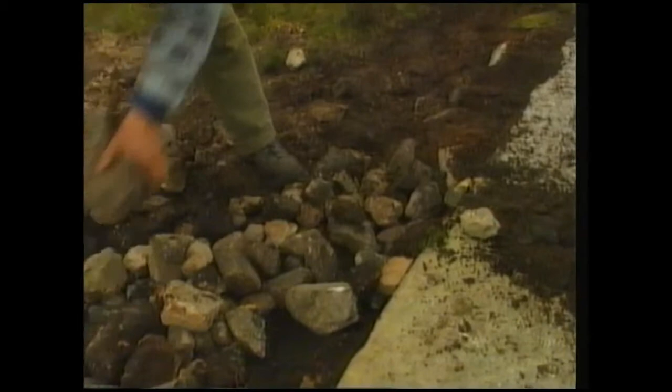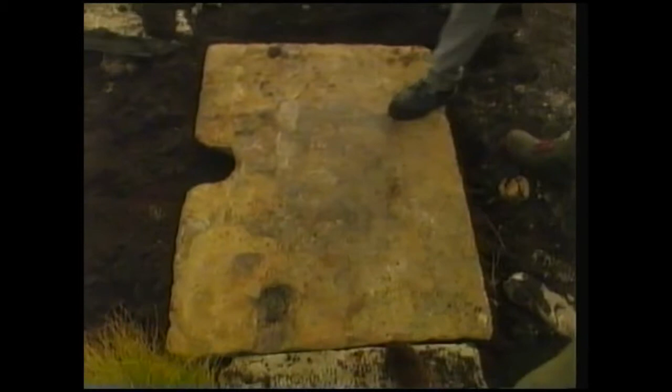Footpaths are quite simple to make. Dig off a level surface and put down some paving stones. Then shore up the sides with rocks and turf. Oh, it's a beauty. It would take thousands of walkers to wear this away, and you could eventually replace it.

But how would you build a road for heavier traffic? One of the first modern road builders to tackle this problem was John Metcalfe, who was born in 1717. He was known as Blind Jack because he lost his sight at the age of 6. But it never seemed to bother him much. In fact, he was a keen sportsman.

Jack was once offered a lift from London to Harrogate, which was more than 200 miles. But he turned it down because the roads in those days didn't exactly give you a smooth journey. Jack was convinced it would be easier on foot and spent most of the walk thinking about how to build proper roads. Even though he got lost twice, he still made it to Harrogate in 6 days, 2 days faster than the stagecoach.

One of Jack's first big projects was to build a road across the Pennine Hills on very soggy ground. He always decided for himself exactly where his road should go, although no one could figure out how he did it. Once he decided where to put the road, he had trenches dug on either side, with all the earth heaped into the middle. When this was dry, Jack laid bundles of heather, first one way, then the other, to make a strong base.

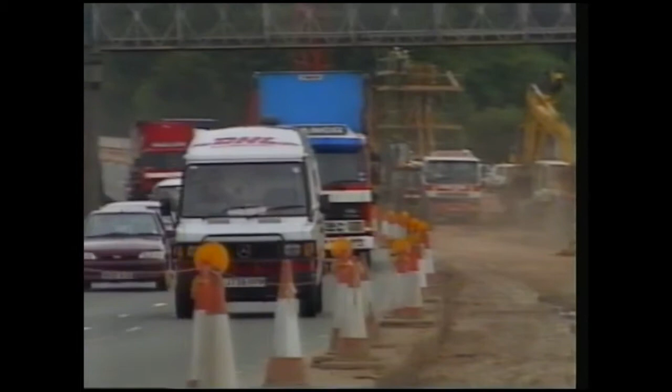Road builders have to know if the ground is strong enough to support the traffic. They also have to be sure that the slopes of cuttings like this one won't collapse onto the road. Cuttings are often used to take roads through hills. After the ground has been dug out to the right shape, the road is built up layer by layer using many different materials.

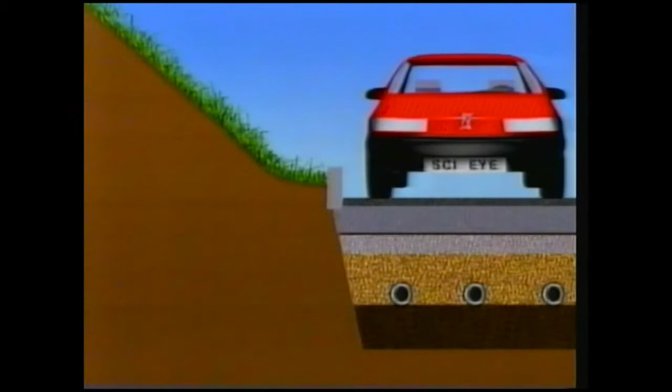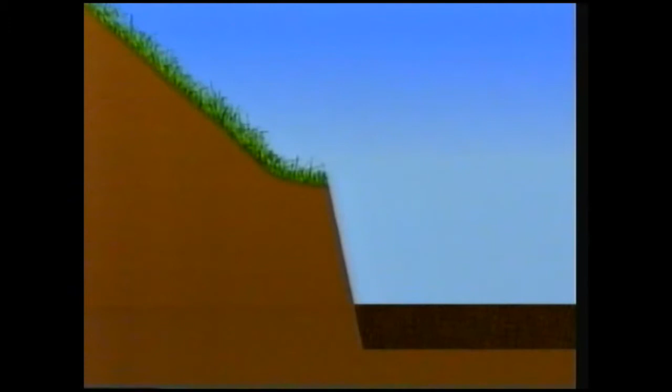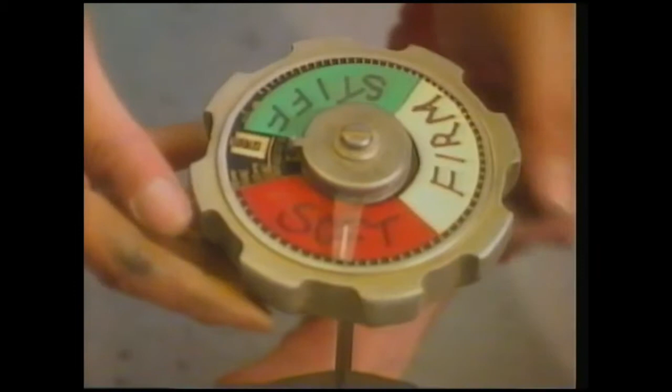The clay in the ground underneath has to be strong enough to take the weight of all these layers. In a laboratory near the road site, they can do a quick test on the clay that they're building on. The stronger the clay, the more difficult it is to twist the little propeller. The strength of the clay depends on the size of the particles that make it up and on how much water it contains.

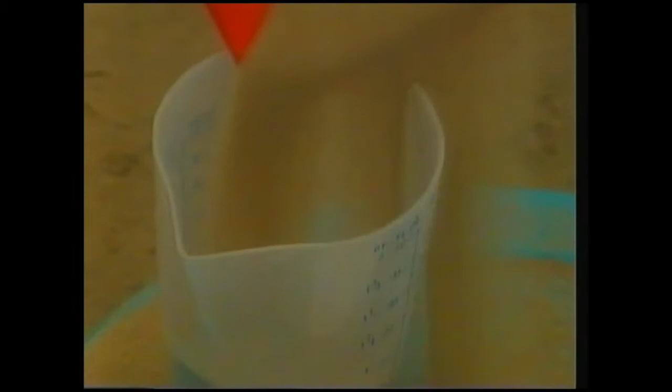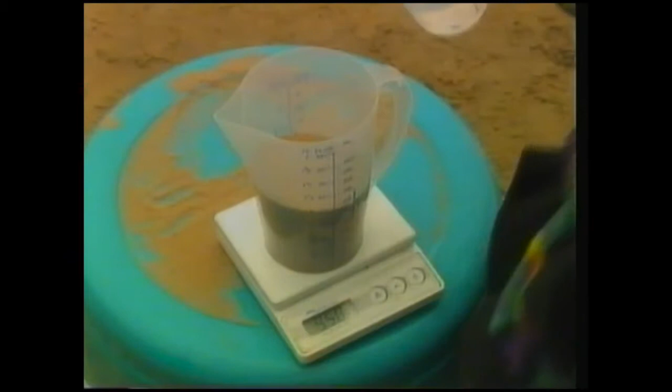The strength of building materials often depends on water content. Everybody knows that the perfect sandcastle needs just the right kind of sand. If you want to get scientific about it, you can work out exactly the right water content for sandcastles. He's weighed out 950 grams of dry sand. If he now adds 50 grams of water, then he's got sand with a water content of exactly 5%.

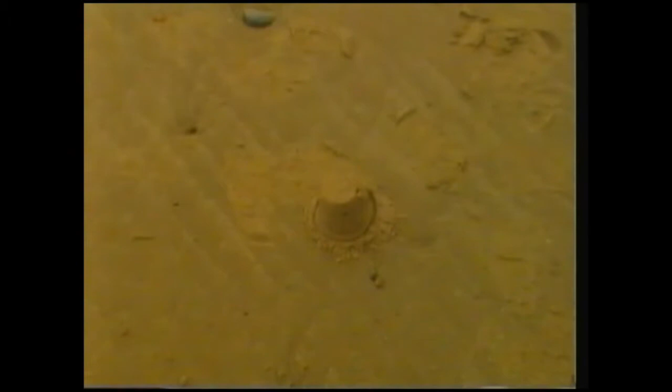To test the strength, he's going to see how much weight it can take. Making the sand wetter should affect the strength, but by how much? If you've ever tried building a sandcastle, you'll know that sand gets a bit stronger as it gets wetter.

But if you make it too wet, it's completely useless. Having found the perfect amount of water to use, he's ready to mix up a decent amount of sand to build with.

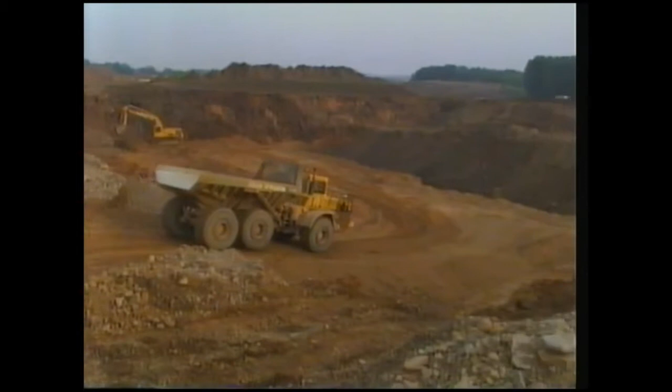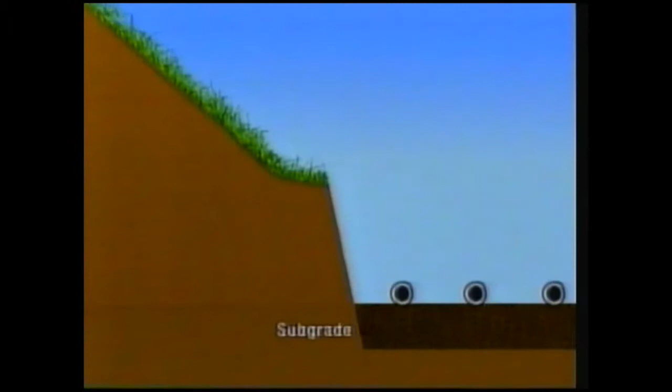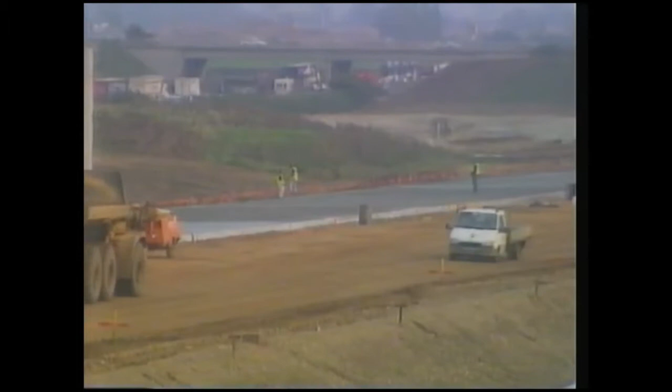If you're building a road, you need something for vehicles to move around on while you're building. The capping layer is made from sand and gravel, which are taken from pits near the road site. There are usually bits of stone in it as well. Drainage pipes are laid to take away any water, which would reduce the strength of the capping layer and the clay underneath. The capping layer helps to support the rest of the road and gives a flat surface to move around on.

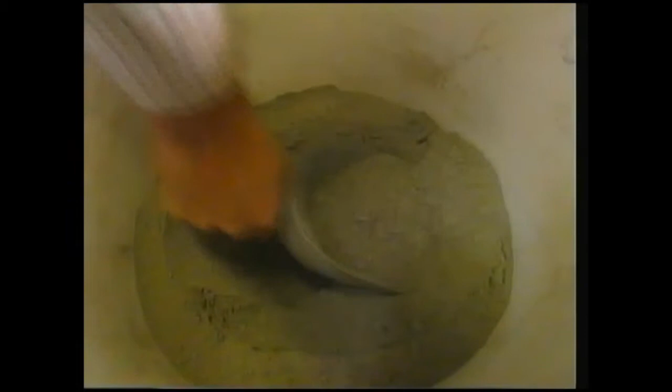The next layer of the road is concrete. This concrete mix contains two different sizes of gravel. The gravel goes together with sand and cement, a manufactured material which holds everything else together. When all this is mixed with water, it makes a very strong building material. You can make cheaper concrete by using crushed rock instead of gravel and putting in a bit less cement. But it won't be as strong.

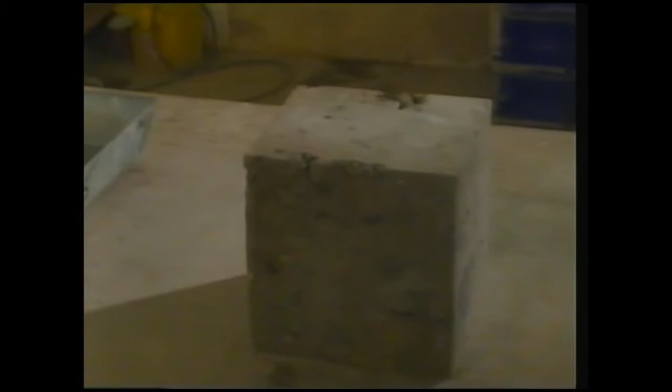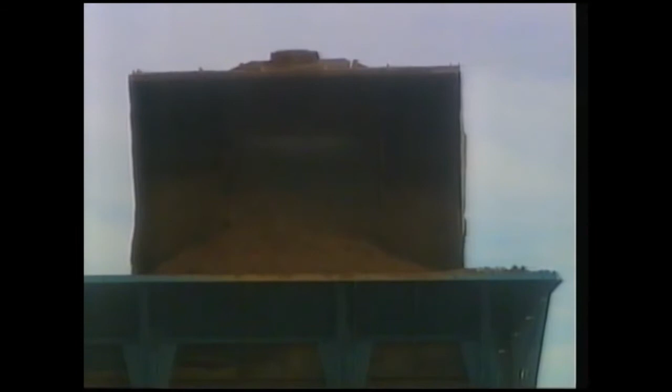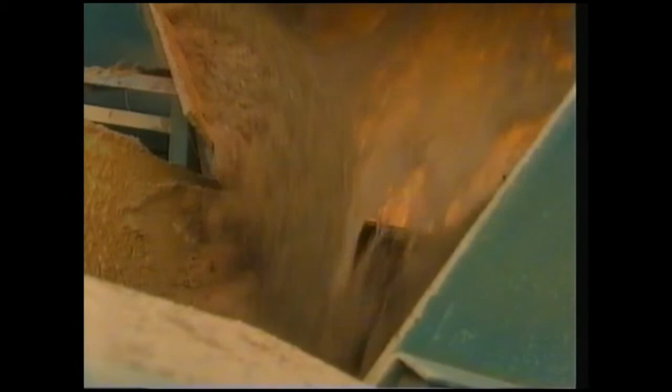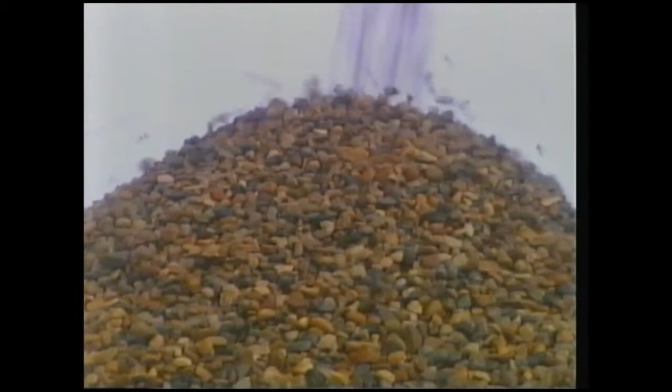Road building needs enormous amounts of concrete. Most of the raw material is dug out of nearby pits. It's washed and sorted into sand and different sizes of gravel. The sand and the gravel is then collected in the right proportions and fed into the concrete mixer with cement and water.

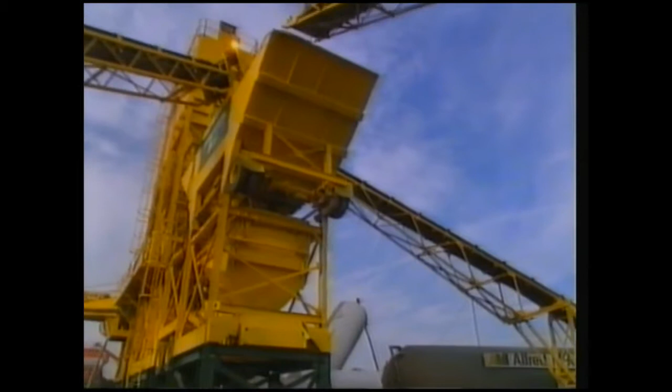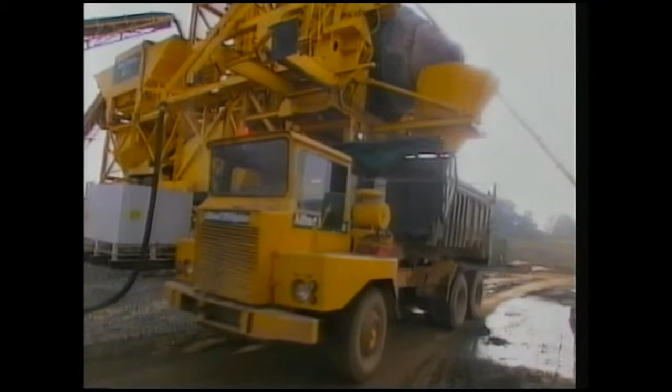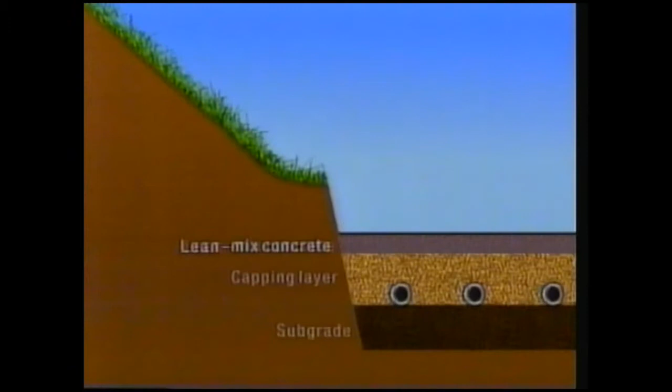Concrete is still wet when it's laid on the road. A layer of tar on top keeps water in while the concrete sets. This is a chemical reaction. The cement reacts with the water to give the final dry concrete.

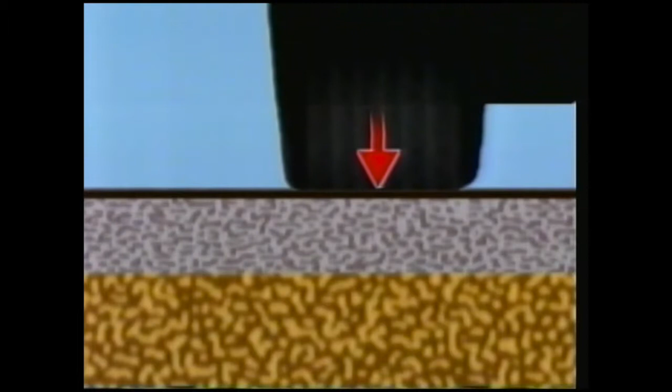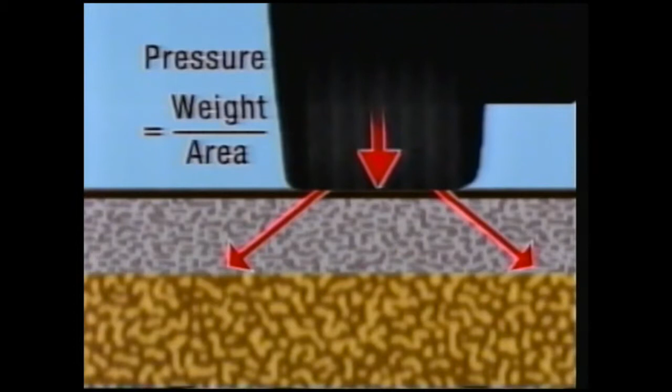The weight of every car puts a large force on the road. But particles of sand and gravel in the concrete cause this force to spread out. The pressure on the road is weight divided by area. By the time it reaches the bottom of the concrete layer, the weight is spread over a bigger area. So less pressure is put on the layers underneath. Concrete is incredibly strong in compression. That means you can squeeze it very hard.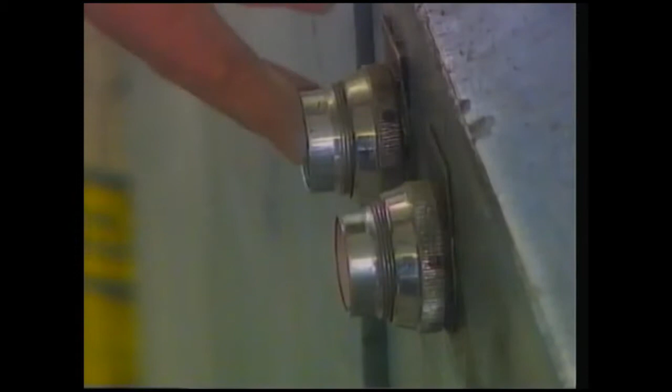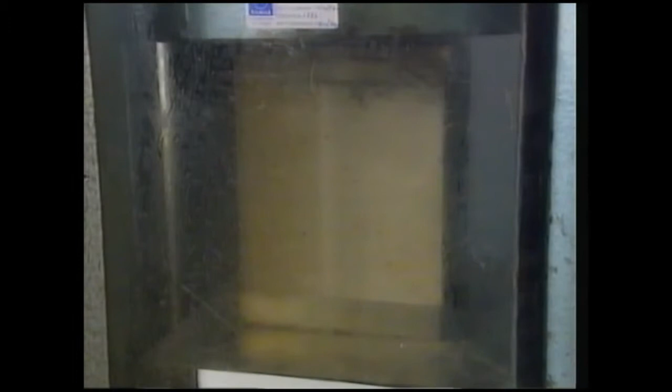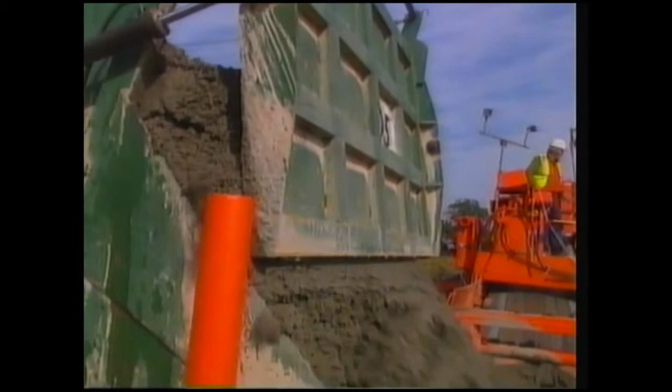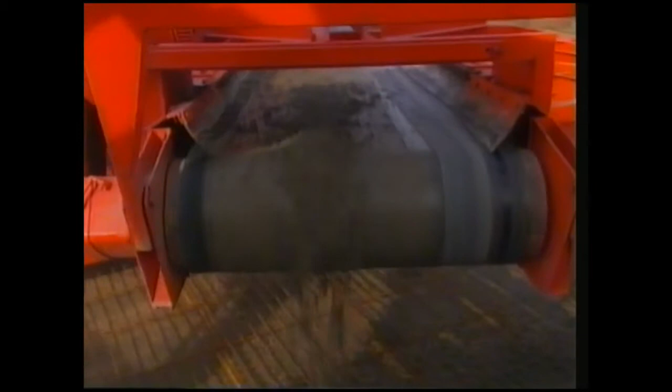A small amount of each batch of concrete is tested to make sure it's up to standard. It took 800,000 newtons of force before it failed completely. That's the same as the weight of 10 double-decker buses. One layer of cheaper concrete has already been laid down. They're about to put down another layer of stronger, more expensive concrete, but it has to be reinforced.

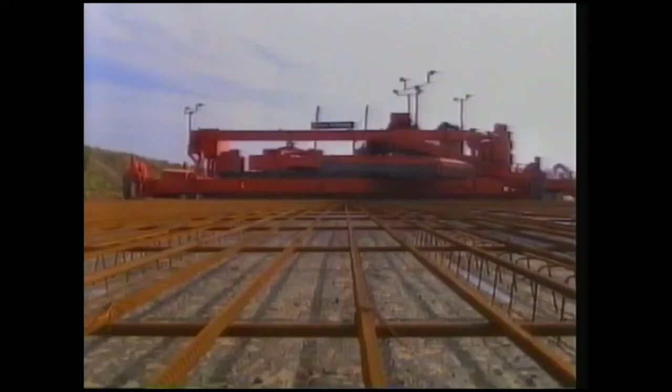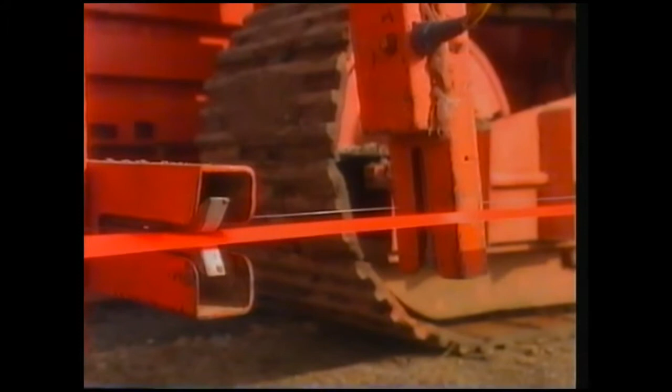When a load is put on a layer of concrete, it bends. This squeezes the top half of the layer, but we know concrete can be squeezed very hard. The bottom half is stretched. Concrete is not as strong when it's stretched, so they have to strengthen the bottom half of the layer. Steel reinforcements are placed on top of the previous layer of concrete, and the new layer is poured in. A thin wire marks the thickness that's needed, and powerful pistons keep the whole machine suspended at just the right height.

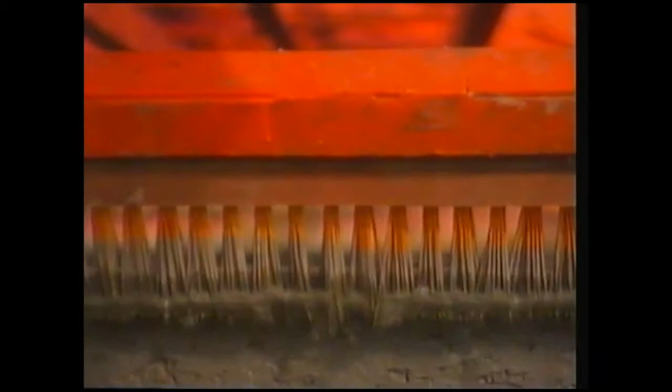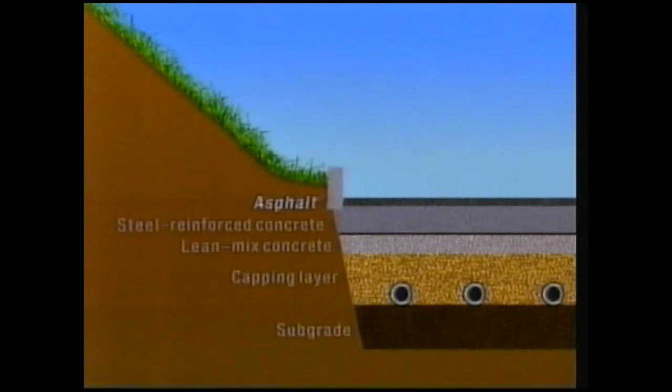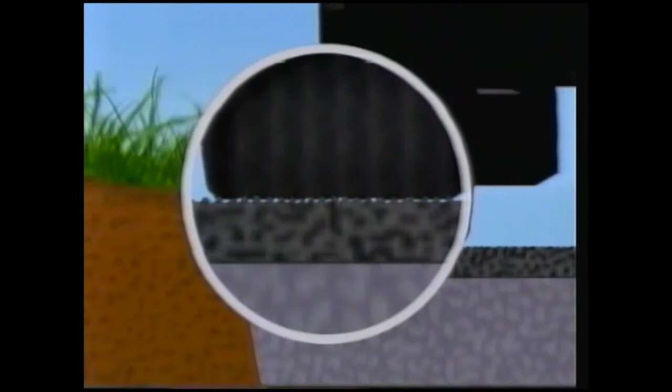There's one more layer of road to come. Why isn't smooth concrete a good surface to drive on? The surface of a road needs to have good grip, so that vehicles can stop quickly in an emergency. Surface water has to drain away, because it makes the road lose grip. The very top surface of a road is usually asphalt, which contains very tightly packed gravel held together by tar. If you look more closely, you can see that small chips of stone are rolled into the asphalt before it sets. This gives a rough surface, so car tires can get more grip.

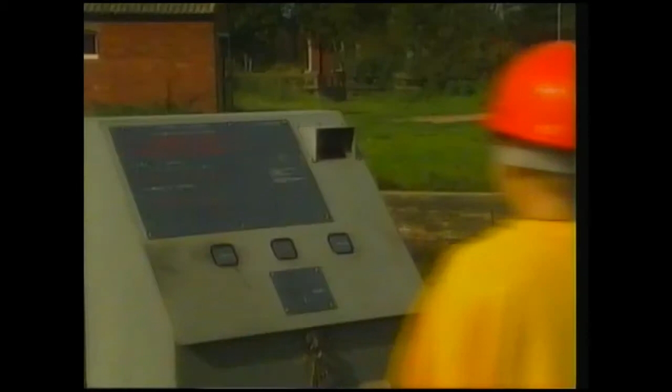How would you measure how much grip a road surface has? Can we borrow your car for a science experiment, please? Yeah, all right. The handbrake is on, so the car can't roll anywhere.

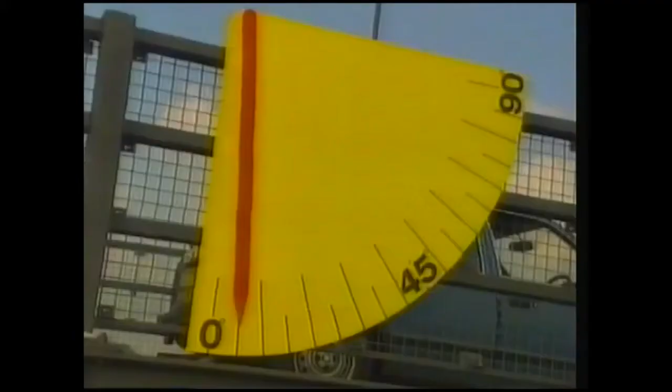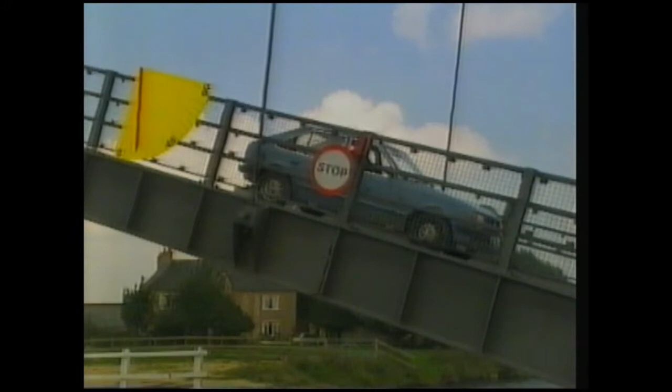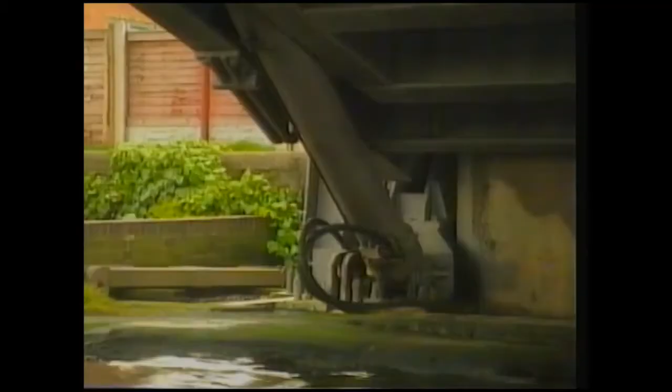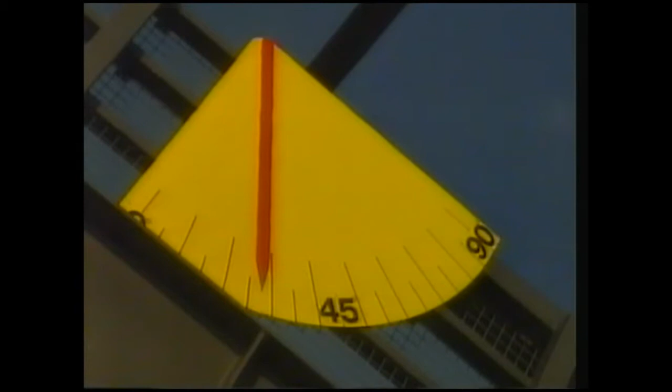The force of gravity always points straight down, so it's trying to pull the car down the slope. The friction force is pointing in the opposite direction, so it stops the car from slipping. With a bit more tilt, the force down the slope is increased. When it becomes bigger than the friction force, the car will start to slip. Stop. What's the first angle? 26. The angle of the slope gives a measure of the friction between the road and the car tyres.

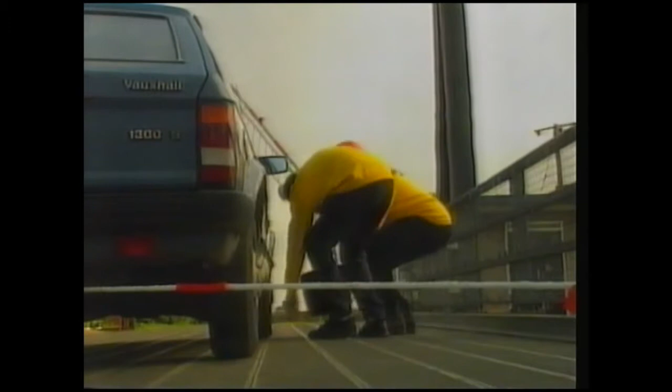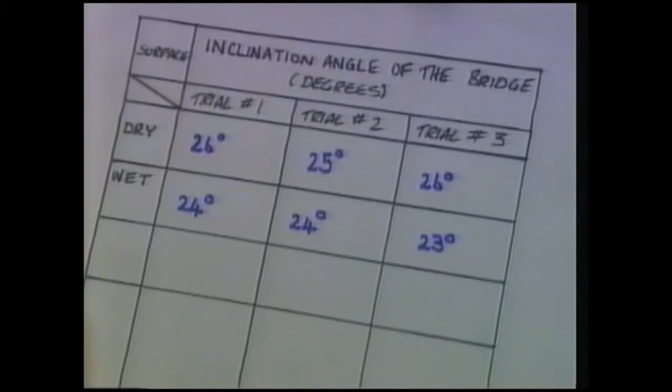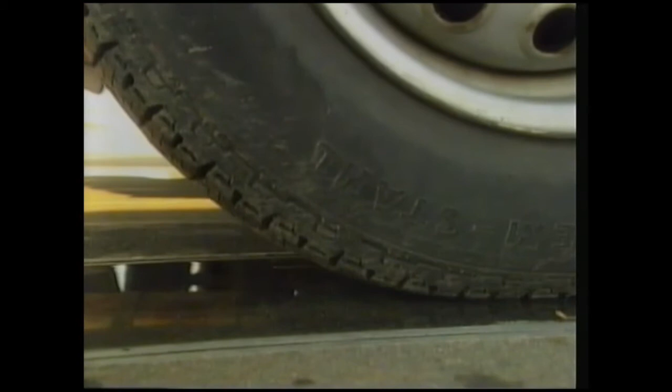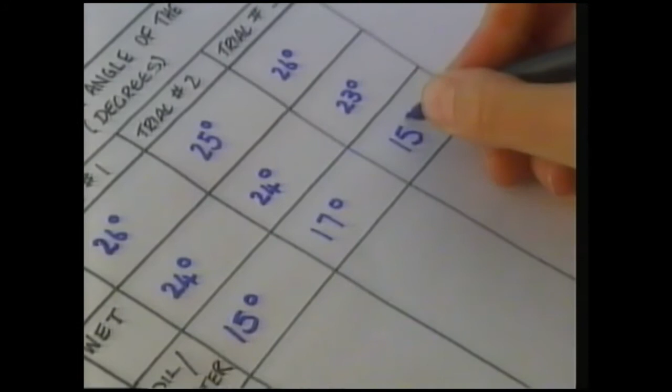But the frictional force can be changed with water. Water only made a slight difference. What about a slippier liquid? Oil makes a huge difference to friction. That's why oil on the road spells danger.